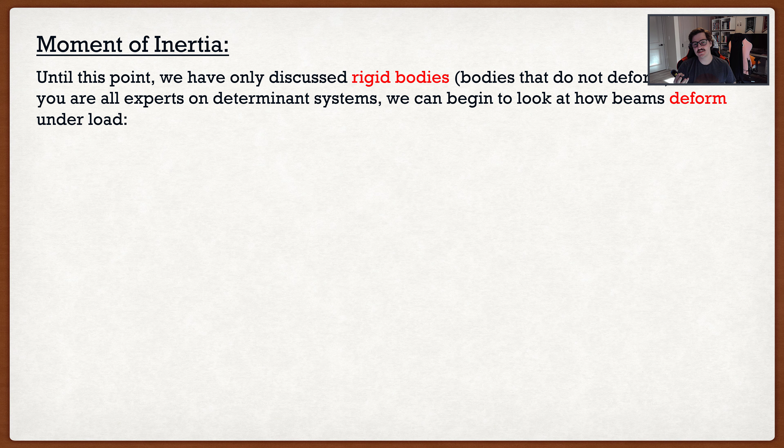So that's why I said this video is kind of the gate to actual engineering, because you took a very simplified assumption, which is rigid bodies, and now we are going to start talking about bodies that actually deform. It sounds like it's going to be very complicated, but it's actually not. Let's say that we have a simply supported beam with a load Q. You are now the masters of rigid bodies, so you can find the support reactions, the shear diagram, and the bending moment diagram. So it's only logical that the next step would be actually finding the deflection of this beam.

Now, if we were to look at a simply supported beam, let's say a ruler, and it had some load, we know it's going to start arcing and kind of make a smiley face. So we know that the deflection of the beam is going to be something like this. It turns out for linear elastic materials, we can actually measure the deflection at certain points. For instance, if I wanted the deflection, which I'm going to call delta, at the midspan, I can calculate it using the following formula, where it's 5 times Q times L to the 4.

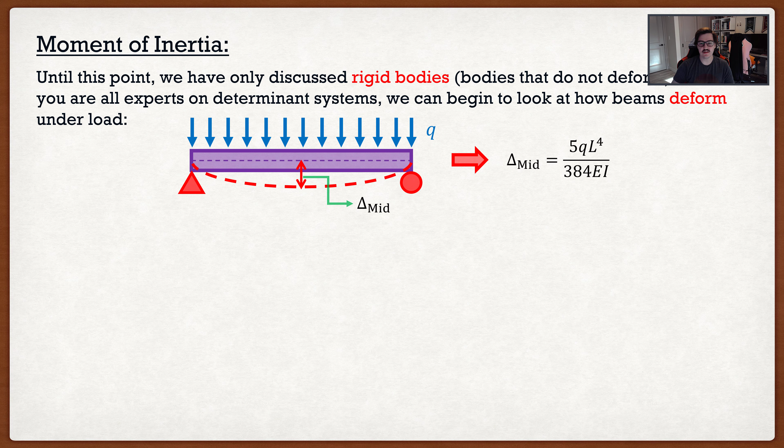So Q is our distributed load. You all know what that is. L, that's going to be the length of the beam. Again, you all know what that is. And then it's divided by 384 EI. So if we look at this formula, you guys know everything in it besides two things, and that is that EI term. So the bending of beams is a function of E as well as I. E is referred to as the Young's modulus, and it's related to the material that we use. It makes sense.

If I were to take my ruler and bend it, well, I can only bend it this much because it's made out of cheap plastic. If I were to take something much stiffer, like my iPad, which is made of metal, I can't exactly bend it. Well, at least I don't want to try to bend it, or else we would be having a very bad time. So basically, this is related to the material properties of a beam.

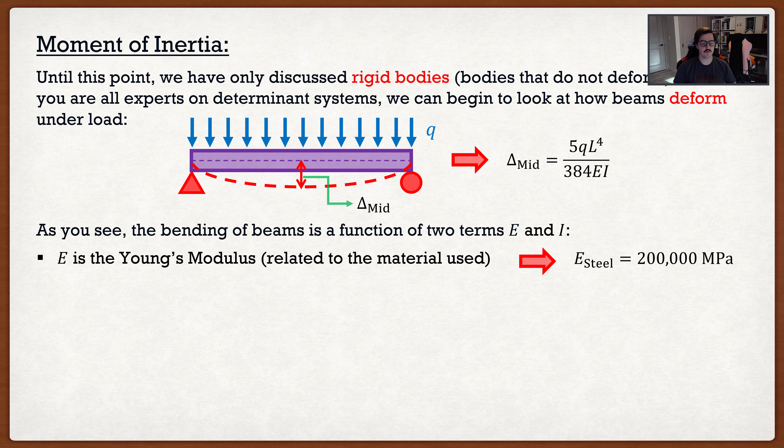Makes sense. If we have a stronger material, it's not going to bend as easy. For example, for steel, this would be 200,000 MPa. So as we're going to see, it's typically constant in these elastic materials. The second one, which is kind of the topic of today, is moment of inertia, and it's related to the geometry of the cross-section. As we're going to see, depending on the cross-section of our beam, it's going to bend

either easier or harder. The best example would be if I were to take a book and I were to bend it this way, as we can see, it's very easy to bend. But if I were to flip it over, so again, I didn't change the material properties, I didn't change the length or anything else, and I were to try and bend it now, well, as we can see, it's not really bending. Easy to bend one way, not so easy to bend the other way. So bending of beams is related to two things: material properties as well as the geometry of the cross section. And that geometry of the cross section is going to be the topic for today.

So if we were to do a simple example of which one's easier to bend, and I were to have two rectangles, a purple one and a blue one, and again they have the same dimensions, same length, same material properties, we already know that that blue one is going to be harder to bend. We just did the example. So this would be the purple one, nice and easy. This would be the blue one, very hard. So again, intuitively, we know that the blue shape is going to be harder to bend.

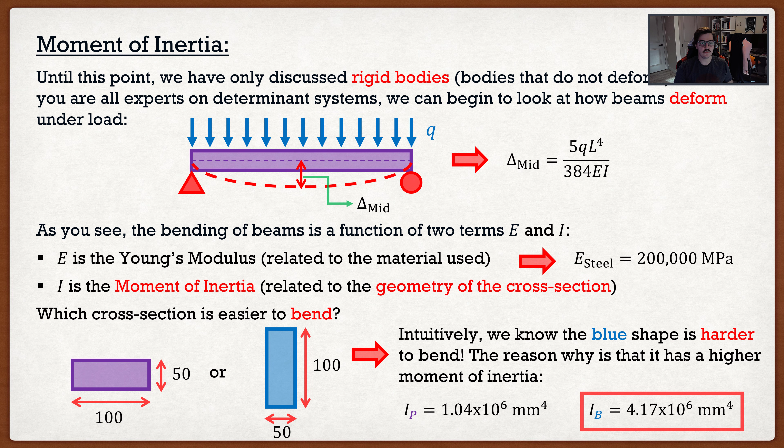And the reason why is because it's actually going to have a larger moment of inertia. If we were to compare the two, we can see that the blue one is around 4 times as much as the purple one. So we can see that the math actually checks out. Intuitively, we know it checks out, but how exactly do we calculate this moment of inertia? Well, it's actually pretty simple. The moment of inertia, which can also be referred to as the second moment of area, is basically a measure of how efficient a cross-section is at resisting bending. Now, the formulas for them are actually quite simple.

If I want the moment of inertia about the x-axis, it's going to be the integral of y squiggle squared dA. And if I want the moment of inertia about the y-axis, it's going to be the integral of x squiggle squared dA, where x squiggle and y squiggle are the distance from the axis to the centroid of the element, and dA is going to be the area of the element.

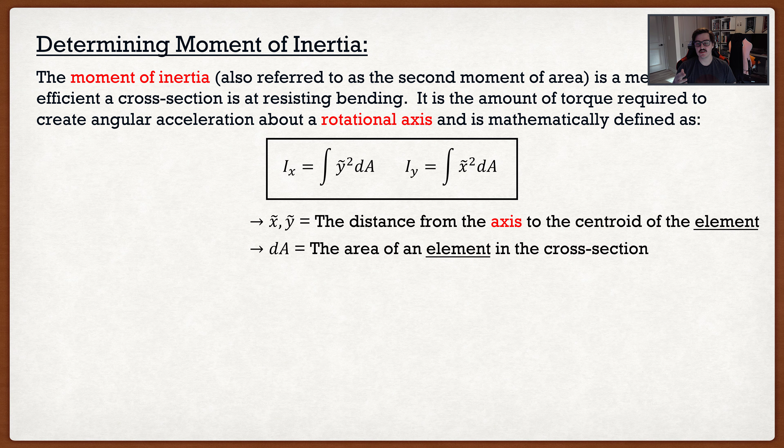So this is going to lead to the first key thing I want you all to remember about moment of inertia. If we look at y squiggle and x squiggle, it's the distance from the axis to the centroid of the element. So depending on where our axis is, the moment of inertia is actually going to change. So again, the moment of inertia is dependent on the location of our bending axis or our rotation axis.

So if we were to have a scenario here where I were to have two identical beam cross sections, and one of them was slightly farther away from the axis, or the x-axis in this case, that would be the blue shape, and we were to look at y squiggle, well, we can see for the purple one it'd be around this distance, but for the blue one it's going to be much greater. And if we look at our formula for moments of inertia about the x-axis, we're going to take that distance and we're going to square it. So this would actually result in the blue shape having a much greater moment of inertia than the purple shape, even though they are the exact same shape.

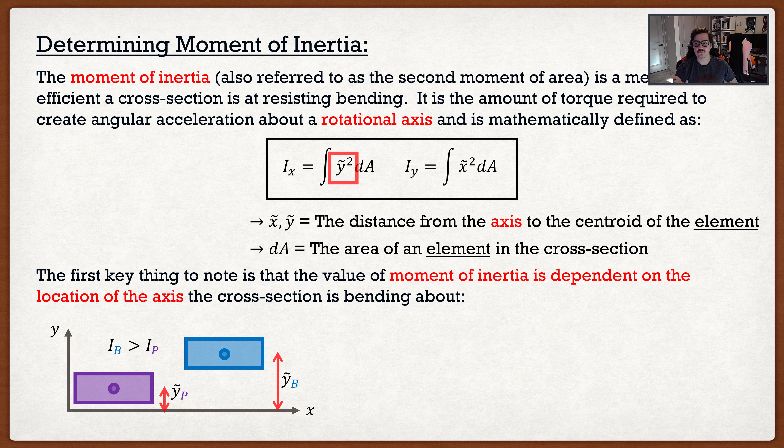Now you're saying, Clayton, this is amazing. How can we actually take advantage of this in design? Well, you see it all the time. This is why you see I-beams, or they're actually called W-shaped beams. We take a lot of that area that's in these shapes and we try to push it to the farther ends, because typically in design we want the moment of inertia about the centroid.

So if we were to look at this shape, we know it's symmetric. So the axis that we'd want to take the moment of inertia about, it's around the center, and we want to take a lot of that area of the shape and push it as far away from the center as possible. So this is why you see beams like this. They also have other advantages in terms of strength, but we're not going to actually talk about that.

You'll see for a lot of the very long span beams where we'd have a lot of deflection, this is why we use beams with such a great depth. So these beams right here, these would be something like bridge girders where they have to span maybe 30, 40 meters. So if that's the case, again, we want our shape to have a high moment of inertia so that when the cars go by, the beam doesn't just sag like this. That would be pretty scary.

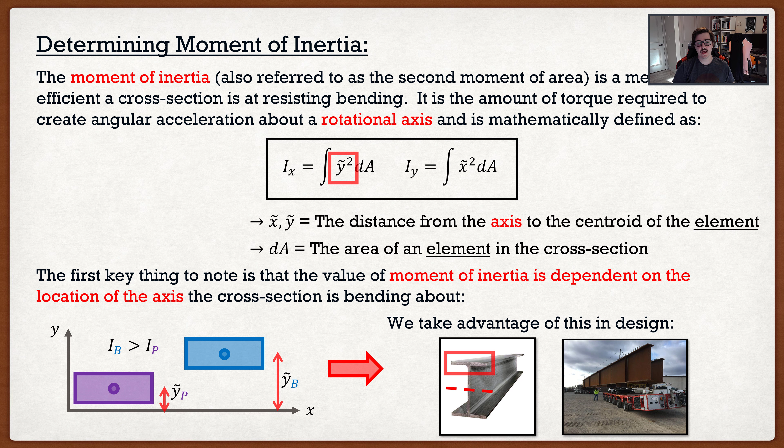So now that we have the formula and we know what moment of inertia is, we can start calculating the moment of inertia for some simple shapes. So let's start off with a rectangle. Again, as I said, typically in design, we're mainly interested in the moment of inertia about the centroidal axis. So this would be the axis that passes through the centroid of our shape. Because as we'll see later on in design, this is about where our shape would bend.

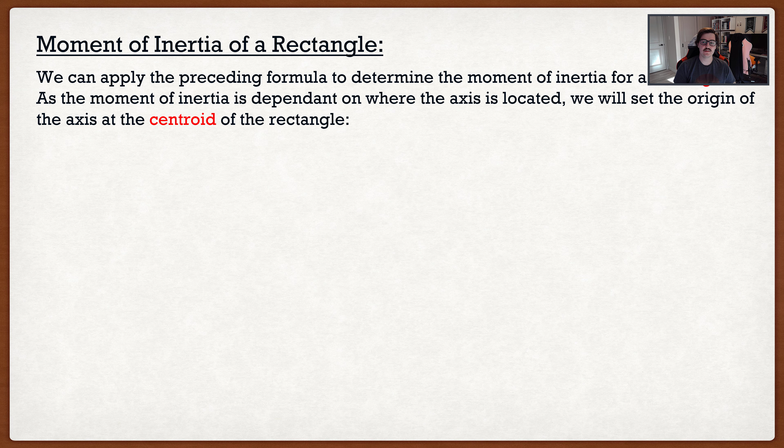So if we were to actually look at our rectangular cross section here, you'd find that if this is truly linear elastic, all the area above the x-axis would be in compression, and all the area below the x-axis would be in tension. That's why we're so concerned with things about the centroid. So if we wanted to find the moment of inertia about this x-axis, we know that our formula is simply going to be the integral of y squiggle squared dA.

So again, the whole process here is going to be the same as for centroids, where in order to solve this integral, we want to basically take a slice. So do I take a vertical slice or do I want a horizontal slice? Well, you can take either. They're going to give you the same answer. But for me, I always look at what I have in here. So right here, I have a y squiggle. This basically means to me that I want to have my integral in terms of dy. It'll make my life easier.

So in order to get a dy, I need a horizontal slice. So I'm going to take a horizontal slice here, and we know that y squiggle in this case is just going to be equal to y. Now if I were to take that slice and expand it, the height of this slice is going to be dy. That's why I picked the horizontal slice. And the width of this slice is going to be b. It doesn't matter where this slice is, it's always going to have a width b. So dA, the area of the slice, is simply b times dy.

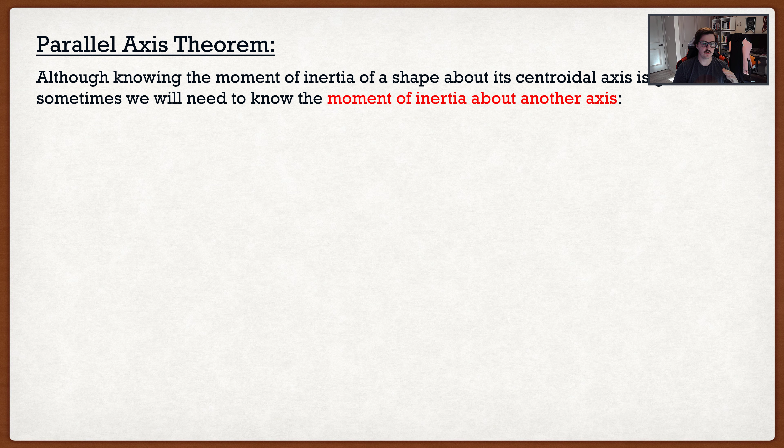So if we have a rectangle, again, we found Ix as base times height cubed divided by 12, but this is only if our x-axis passes through the centroid of our rectangle. And you're saying, okay, well, what exactly does this mean? Well, it means that if the prof wants to be mean on the exam, they're going to say, okay, you know it about the x-axis that passes through the centroid, but what happens if I want the moment of inertia about this axis x prime? Now, if you don't know parallel axis theorem, you're going to have to go integrate. No one wants to integrate, let's be honest.

But this is the trick. This is the goal of parallel axis theorem. You're saying, Clayton, I don't want to integrate. Integrating sucks. Well, parallel axis theorem basically says that if we know the moment of inertia about the centroidal axis, which we do, base times height cubed divided by 12, then we can easily determine the moment of inertia about any parallel axis. Well, you're saying, okay, how do we do that? Well, it's simple. The formula is the moment of inertia about any parallel axis is going to be equal to the moment of inertia of the centroidal axis plus A times d squared.

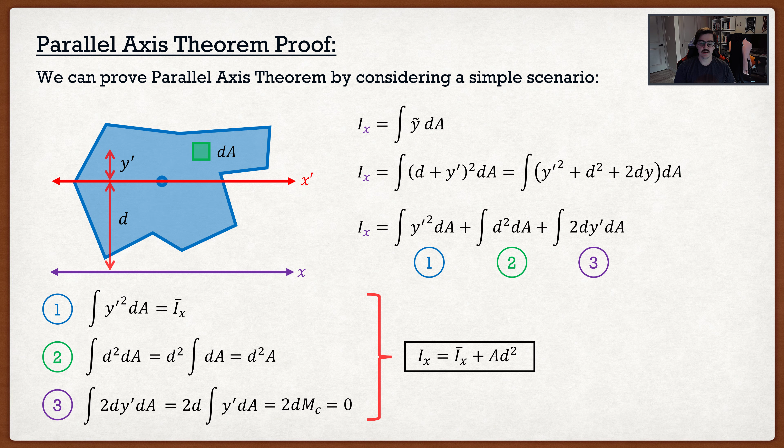Everything balances. So the summation here should be equal to 0. And if this is the case, the moment of inertia about the x-axis is equal to the moment of inertia about the centroidal axis plus A times d squared. Now this is very important. I want you all to remember this. This term right here will always be the moment of inertia of the centroidal axis.

And the reason why is this. That third integral, we said because it balances, is equal to 0. If we were to take the moment of inertia at some other spot, it doesn't balance, so that third part would actually be non-zero. So this formula only works because we're taking the moment of inertia about the centroidal axis.

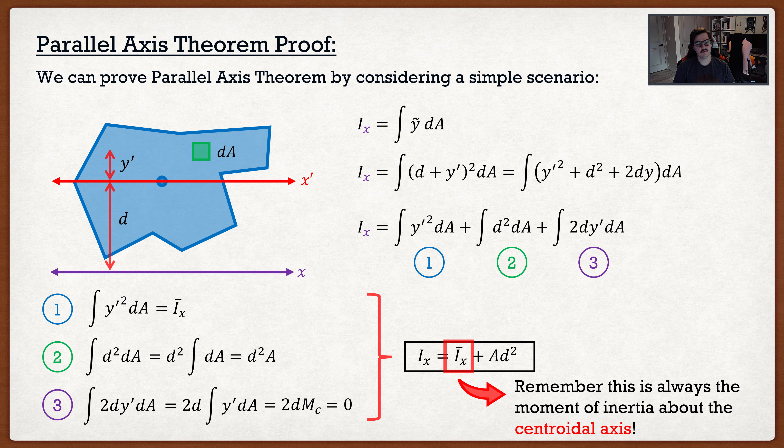Now you're saying, Clayton, what can I do with parallel axis theorem? Well, there's going to be a bunch of things.

The first one is it actually allows us to solve for the moment of inertia for other simple shapes that we normally couldn't really do using the integration method. The best example would be a right triangle.

If I were to look at the centroidal axis, which we have displayed here, and we say, okay, if I want the moment of inertia about the x-axis, it's going to require a horizontal slice, just like before. Well, you can immediately run into problems because it's very difficult to define the actual base of this slice. It's not impossible, of course, as you math nerds know, but it does become very difficult.

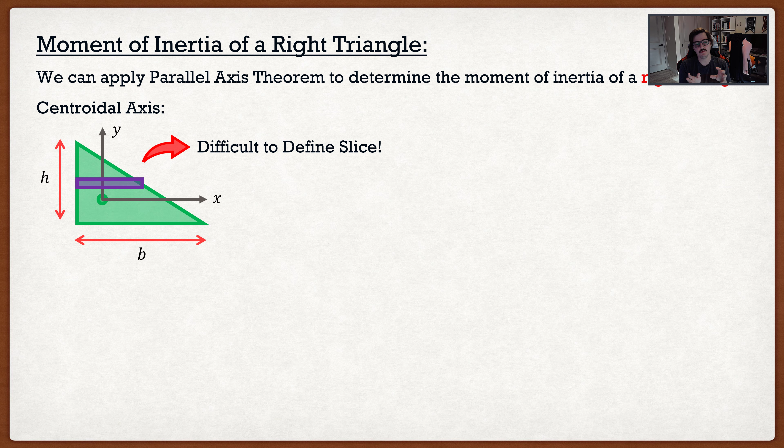So rather than actually going from the integration method directly into the centroidal axis, let's consider a different scenario where I want to calculate the moment of inertia about this axis right here. Again, this one's not the centroidal axis, but in this configuration, our life is actually a lot easier because I can define my horizontal slice as follows, and we know that y squiggle is just going to be equal to y.

And if I were to look at the slice itself, it's going to have a thickness dy, and it's going to have the base as a function of y, which is going to be b minus b over h times y. Now, the first thing I'm going to get asked a lot is, hey, Clayton, how exactly did you get that? Well, keep in mind that triangles are just linear lines. So all I did was take y equals mx plus b, and then I rearranged for x. So it's not too bad.

Now that I know both the base and the height of this slice, I can find the area as simply base times height. And then from there, I can go into my moment of inertia formula, where it's the integral of y squiggle squared dA. I know what dA is, as well as y squiggle, so I can substitute everything in. And I get base times height cubed divided by 12. It's actually the same as a rectangle, believe it or not, for this particular case.

Now, this is nice because I can take what I've learned on the parallel axis side, and come back to my centroidal axis side and calculate the moment of inertia about the centroidal axis. If we look at parallel axis theorem, we know that Ix is equal to I bar x plus A times d squared. I want to find the moment of inertia about my centroidal axis, so I'm going to rearrange the formula where Ix bar is equal to Ix minus A times d squared.

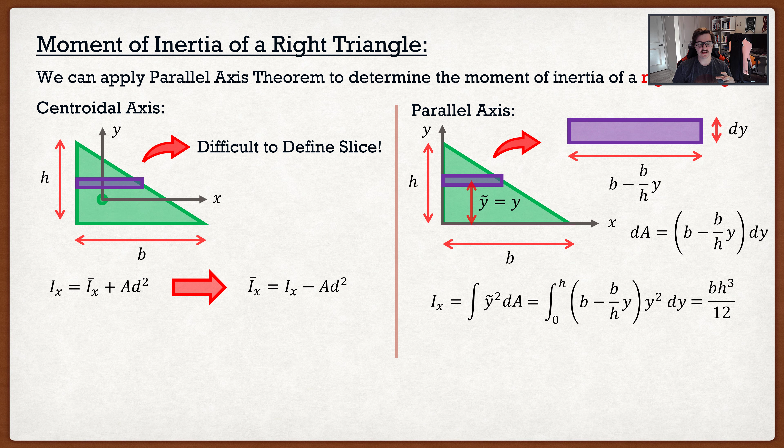And if we were to look at this, we actually know what everything is. First, we need the moment of inertia about any axis. On the right-hand side, we found the moment of inertia about the axis that is parallel to the base of the triangle: base times height cubed divided by 12. We need to know the area of the shape next, but that's just going to be 1/2 base times height.

And the last thing we need to know is d, the distance between the two axes. For a triangle, the distance between the base and the centroid is going to be h over 3. So everything is lining up quite nicely. We can substitute everything into this formula, and we get base times height cubed divided by 36. And if we repeat this same process for the y-axis, we can conclude that the moment of inertia for our right triangle is base times height cubed divided by 36 for the x-axis, or height times base cubed divided by 36 for the y-axis.

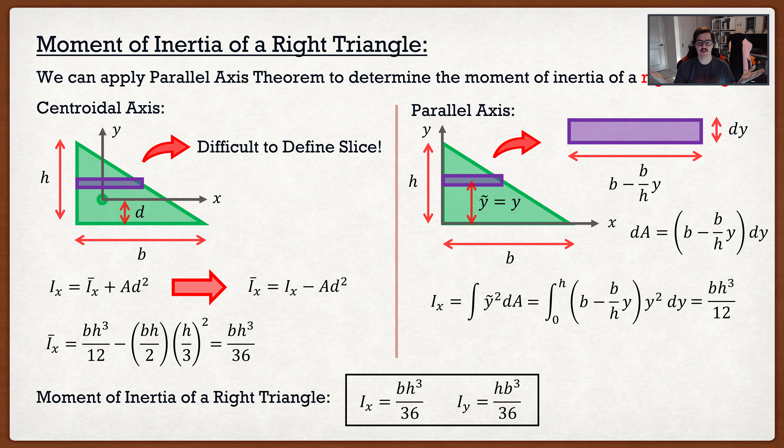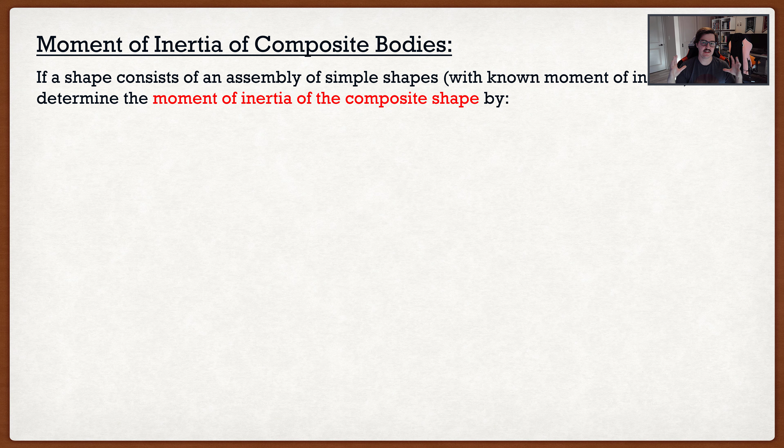So it's pretty nice. But again, in exams, typically they give you the moment of inertia for all these simple shapes. And you're saying, okay, if they just give it to us, what's the challenge? Well, just like centroids, many exam questions focus on the moment of inertia of composite bodies. These are bodies that are basically an assembly of simple shapes connected together.

So to calculate the moments of inertia of one of these composite shapes, all we need to do is find the centroid of the composite shape, and then using parallel axis theorem, find the moments of inertia of each of the simple shapes around that centroidal axis, and then sum it all together.

Now I know you're reading that thinking, what? Like, come on, Clayton, that's a bunch of word garbage. Show me what it means. Well, let's go back to this example over here. This is something that we actually covered in centroids. Let's say that I wanted to know the moment of inertia about this composite shape about its own centroidal axis.

So if we were to look at this shape, we know from the centroid lecture video, we can figure out the centroid of each of the two shapes, y squiggle b and y squiggle p, and we know that the composite shape has a centroid y bar. So typically in exam scenarios, you will see that moment of inertia and centroids are actually covered in the same question, because for many cases we need the centroid to find the moment of inertia. If we didn't know what y bar is here, then we actually can't find the moment of inertia because we're going to need those distances.

Now, we actually covered this exact example in the centroid unit, and we figured out that y squiggle b is 50, y squiggle p is 115, and y bar is around 81. I believe it was 80.8, and I know that some troll in the comments is going to mention that, but we're just trying to keep it simple, so I just left it as 81. So again, the whole goal here is to find the moment of inertia of this composite shape around the centroidal axis of this composite shape, which is going to be that red dashed line.

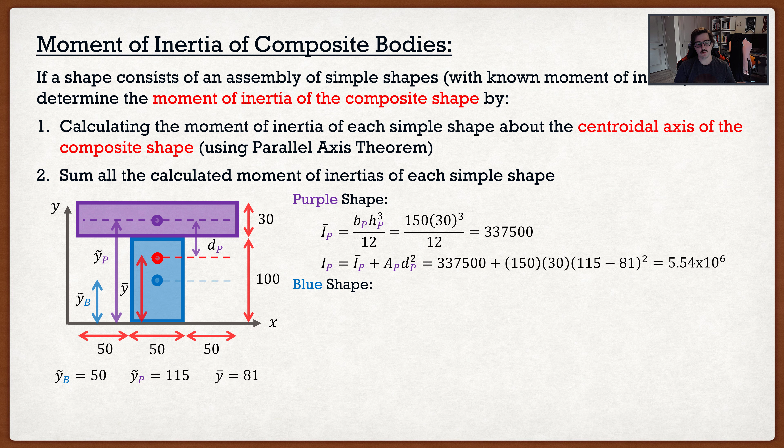And we can repeat this process with the blue shape. So we know that the blue shape is also just a rectangle. So we can find its moment of inertia around its own centroidal axis, which is going to be that blue axis there. Calculate that using base times height cubed divided by 12. And then again, I want to convert that moment of inertia to the moment of inertia around the red axis. Again, using parallel axis theorem, I can find the distance between those two axes, and I can calculate it as follows. From there, I can find the total moment of inertia of this composite shape just by summing everything together.

So all I'm going to do is take the moment of inertia of the purple shape around the red axis and add it to the moment of inertia of the blue shape also around that red axis, and we get the following. So as we're going to see, it's very similar to centroids, where you basically treat each shape independently and then add it together at the end.

Now, one thing that I won't show here through an example, but it's fairly easy to know, is we can also have holes. And if that's the case, all we need to do is find the moment of inertia about the hole and then subtract it from our total moment of inertia. Again, it's the same thing that we did in centroids. If we have a hole, we just treat it as a negative area, if you will. So that's going to be moment of inertia.

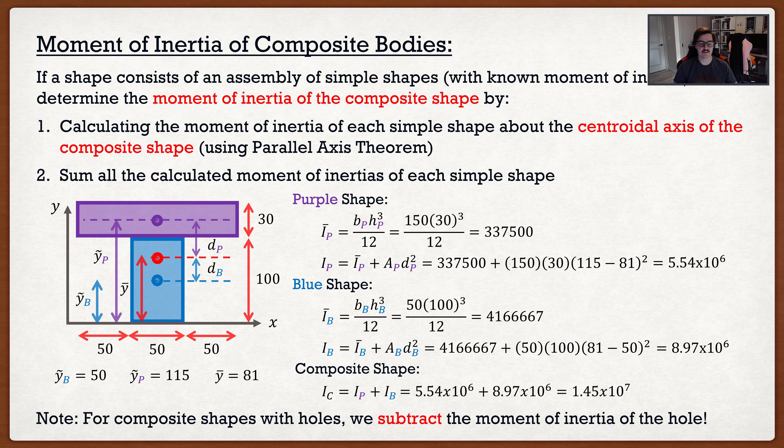Now, there's going to be two other different topics that we're going to talk about. And the first is the radius of gyration. The good news for students is that if you know the moment of inertia, radius of gyration is a piece of cake. So basically, the radius of gyration is a measure of the distribution of cross-sectional area from the centroidal axes. Now you're saying, what?

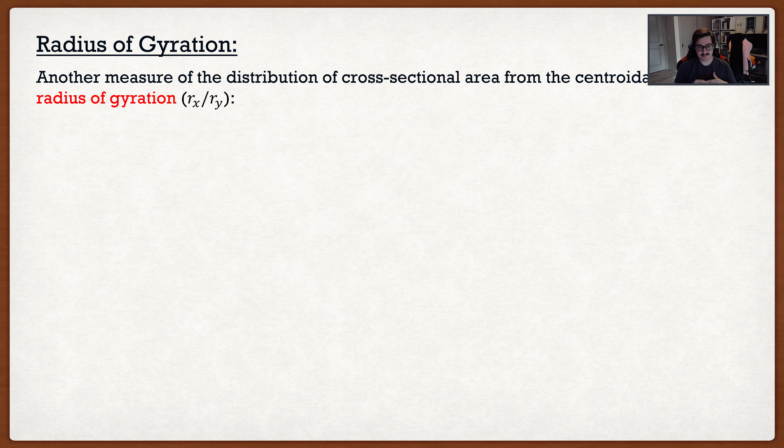Well, the best way to describe it is to show you guys an example. Let's say that we had a rectangle, and we said that if we wanted to find the moment of inertia about the centroidal axis in the x direction, it was just base times height cubed divided by 12. Now we're going to take this and express it in an equivalent system. So rather than having an actual rectangle, I'm going to take it and just express it as a point.

Now this point right here is the entire cross-sectional area of the shape on the left concentrated in a single point. And here's the trick. What I want is both of these scenarios to have the same moment of inertia. So we know that in order to get this point to have the same moment of inertia as the shape on the left, we're going to have to specify a distance. And this distance right here, well, that's actually the radius of gyration. So that's all it is.

Now, if you want to calculate it, again, it's pretty simple. It's just going to be the square root of moment of inertia divided by the area. So if you found moments of inertia, chances are you know area at that point. All you need to do is divide one by the other and then square root it. So it's a piece of cake. Now you're saying, okay, Clayton, how the hell do you use that in design?

Well, radius of gyration actually makes our lives a lot simpler, because what it's related to is instability problems known as buckling. Now, buckling is something that you've probably already seen a lot before. If I were to take something very slender and squeeze it, as we can see, there comes a certain load where it just pops out to the side. That's known as buckling or instability.

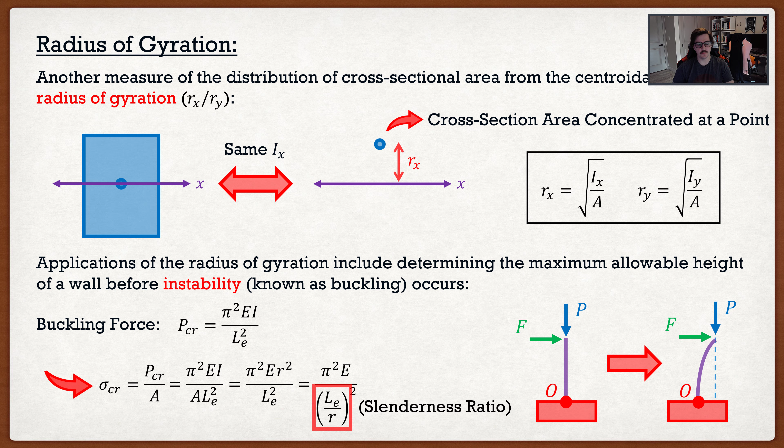So what you'll see is a lot of clauses in steel and especially concrete and masonry. They say if you have a slenderness ratio typically greater than 30, you're going to have to start worrying about all these problems. And you're going to have to do extra analysis, and it actually becomes pretty gross. It makes design pretty hard. But the key thing I'm trying to say is moment of inertia plays a key role in actual design.

The last one is polar moment of inertia. Now, I'm always honest with students. You'll never really see this. Moment of inertia, as we talked about, is how easily something bends. So as we can see, we said in different directions, it bends a little bit different. What polar moment of inertia is, is how easily something twists.

Now, twisting is something that you don't want in design. It's actually referred to as torsion. You don't want torsion in design because the code books don't really have any clauses against it. The steel code in Canada, for instance, basically says if you have torsion, just make sure it's safe. They don't really provide any rules or regulations to guide you to make sure it's safe. It's one of those very complex problems. So as engineers, we typically design our structures to avoid any sort of twisting.

Now, if you want to figure out the polar moment of inertia, it's actually going to be the integral of r squared dA, where r is actually the radius. So this formula right here is actually in polar coordinates. Now, you guys are saying, Clayton, I've taken math. I'm not dealing with polar coordinates. Get that shit out of here. I don't want to deal with it.

Well, we can also express it in rectangular coordinates because we know that the radius squared is equal to x squared plus y squared. It's basically just a triangle. And if this is the case, we can substitute this into our formula above, and we basically have two different integrals. The first one is x squared dA, which is the moment of inertia about the y-axis. And the second one is y squared dA, which is the moment of inertia about the x-axis. So if you want to, you can just add them together to find the polar moment of inertia.

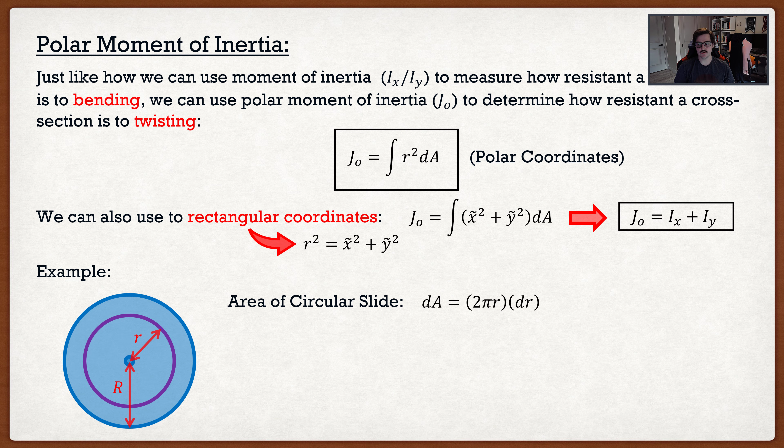Now if I want the area of my circular slice, it's going to be the circumference times the thickness. So 2 pi r, the circumference, times the thickness, which we know is dr. We want that thickness to be basically minuscule. From there, we can substitute everything into our formula, and we have the integral from 0 to r, the radius, of r squared times 2 pi r dr, and then we get pi over 2 r to the 4.

So this is how you can find the polar moment of inertia, but again, I've never actually seen it used, so I want to make that clear. The only time I've actually ever used this in design was the torsion of steel structures, but that is so rare that you basically never see it. Moment of inertia, the original one, you see that all the time. Radius of gyration, again, you see all the time. This one, not so much.